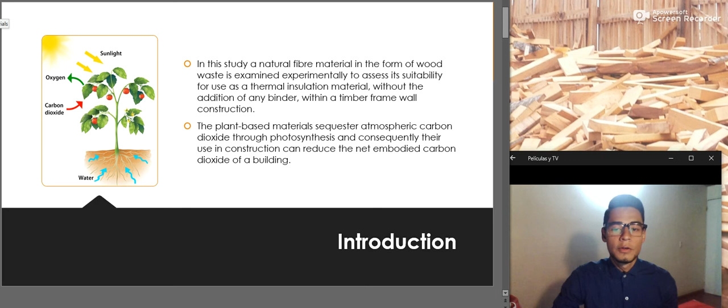The plant-based materials sequester atmospheric carbon dioxide through photosynthesis, and consequently their use in construction can reduce the net embodied carbon dioxide of a building. In the image on the left, we can see the process of photosynthesis, where the plant receives sunlight and water and transforms carbon dioxide into oxygen.

Further materials experimentally studied the potential applicability of woven fabric waste, or WFW, and woven fabric subwaste (WFS) as a thermal insulation for use in construction. The results showed that the WFW had better insulation characteristics than the WFS, and the thermal conductivity value of WFW was similar to the conventional thermal insulation materials.

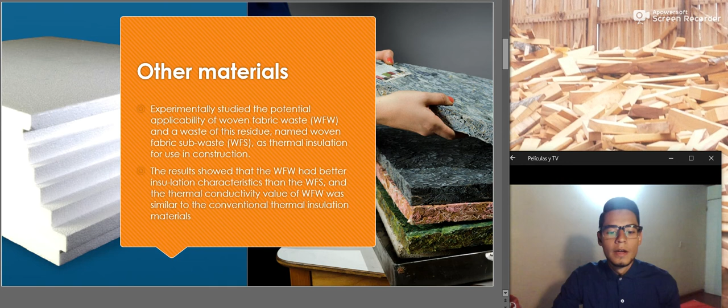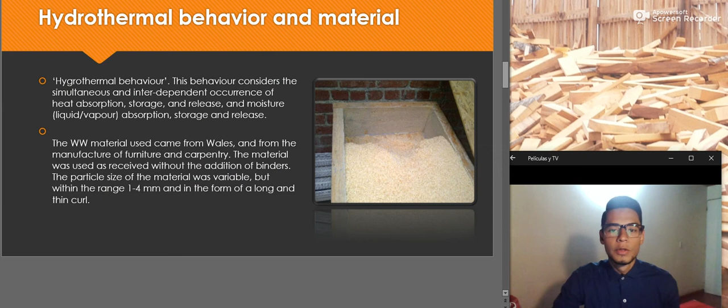The hygrothermal behavior of the material. This behavior considers the simultaneous and interdependent occurrence of heat absorption, storage and release, and moisture, liquid and vapor absorption. The WW material used came from Wales and from the manufacture of furniture and carpentry. The material was used as received without the addition of binders.

The experimental methods. The experiments conducted to determine the apparent density or bulk density, thermal conductivity, water vapor transmission properties, true density or absolute density, water absorption coefficient, and hygroscopic sorption and desorption properties. In most cases, 3 samples of the same material were used and compared.

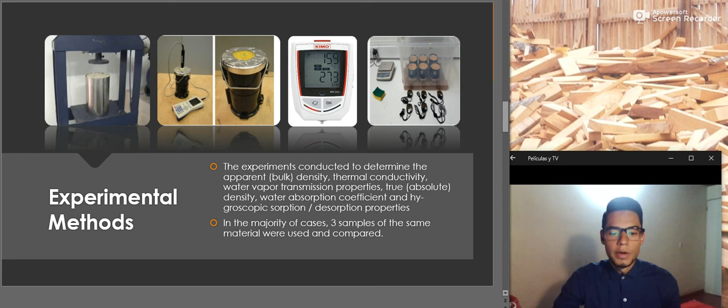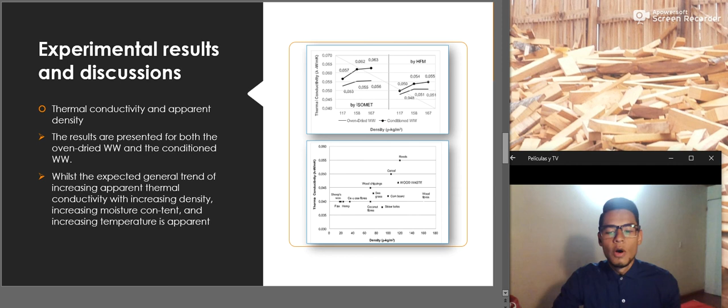Experimental results and discussions. First, the thermal conductivity and apparent density. The results are presented for both oven-dried WW and conditioned WW wood waste. The expected general trend of increasing apparent thermal conductivity with increasing density, increasing moisture content and increasing temperature is apparent. Also, in the lower graph, you can see the comparison of wood waste with other materials.

The hygroscopic sorption and desorption properties. According to the results, the biggest difference in the moisture contents of samples was calculated for 93% during sorption. The moisture content increased approximately 11% at sorption and decreased approximately 9% during desorption, all this across the same range.

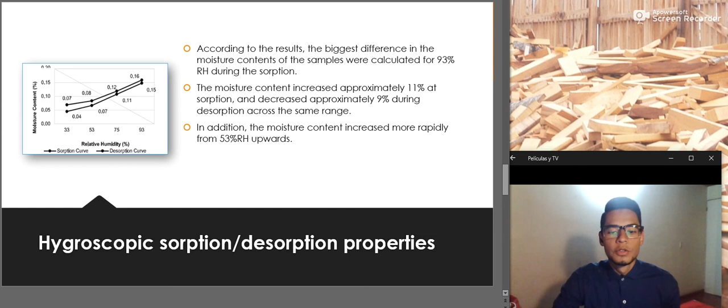The vapor transmission, true density, and porosity. These results indicate that the wood waste WW has a lower vapor resistance at high relative humidity compared to the low relative humidity conditions. The porosity results reveal that wood waste WW is comparable to the other natural fiber materials.

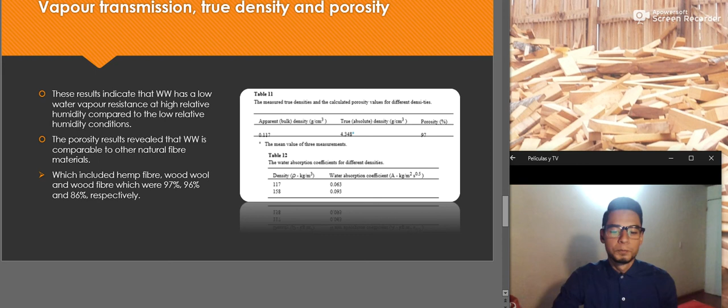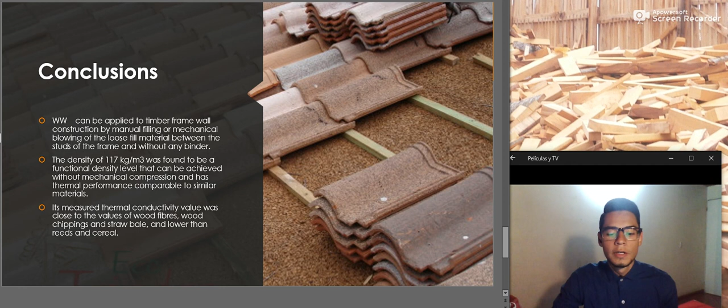As conclusions, wood waste can be applied to timber frame wall construction by manual filling or mechanical blowing of the loose fill material between the studs of the frame and without any binder. The density of 117 kilograms per cubic meter was found to be the functional density level that can be achieved without mechanical compression and has a thermal performance comparable to similar materials.